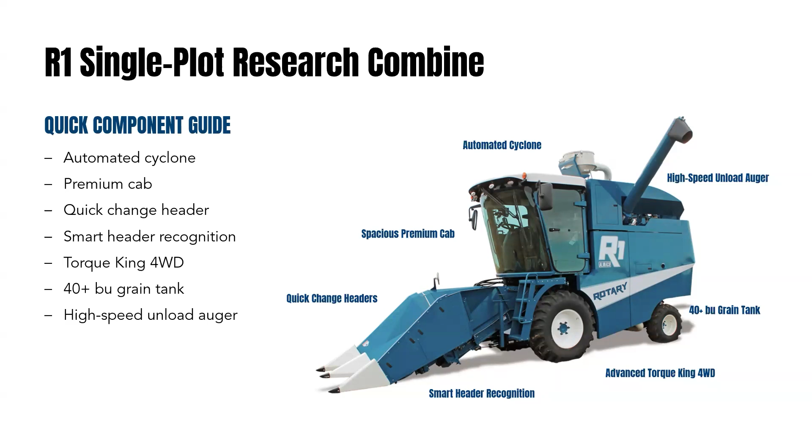So just an overall profile of the combine itself. If you look to the right, you'll see the photo of the machine itself from the left-hand side. This particular unit has a row crop head on it. We've got all kinds of different quick change headers, so it is a quick change, more like a commercial machine. You can see we've got the rounded glass cab, automated cyclone that's electrically - basically it tucks away under the profile at a top height of 10'3" for transport, and then electrically comes up and connects. High speed unload auger, 40 bushel grain tank. We run all of our R1s with the advanced Torque King 4-wheel drive - we don't make a 2-wheel drive version - and also front wheel drive on the front axles.

So some key highlights: it is a top-fed axial rotor design. Most rotors feed from the bottom. Ours is a unique design that allows us to have that clean out for each crop and each plot.

It is a true multiple crop capability combine. We've been running everything from canola, camelina, all the way up to sunflowers, corn, soybeans, sorghum, all your small grains through these machines over the years.

We do have an internal conveyor belt, which helps us with the optimum seed transfer. We can control the speed once it gets through the sieve to that air column cleaning system, which helps us with our plot speed in our shorter times.

It is a streamlined design. You can see it's very smooth and flat on the edges, especially in corn and sunflowers, where we're not damaging those adjacent border plots, or plots if we're doing 2 rows.

It's very simple and basic maintenance, very few grease zerks. The way it's designed, less jack shafts, belts, and drives on this particular machine.

And it's also set up as a microcontrolled based operating system. It's very intuitive, more of a commercial brand that you can basically run the machine with.

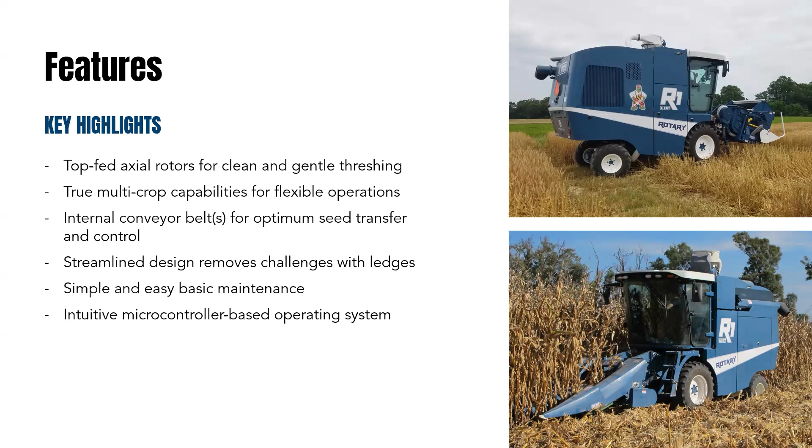So for power, we've gone to Cummins on all of our R-series combines, and even some of our commercial design machines too. This is a 3.8 liter, tier 4 final engine.

You can see from the top right-hand picture, the top assembly just folds down. It's got a built-in ladder assembly. You can walk up and change filters or do any sort of maintenance from the rear of the combine.

Most of the daily checks are from the ground, so you're not even having to get up here, but we do have access. On the 4-wheel drive, lower right, you can see it's a very beefy axle with our 4-wheel drive. We're on the Poclain brand drive motors and electrically controlled hydraulics.

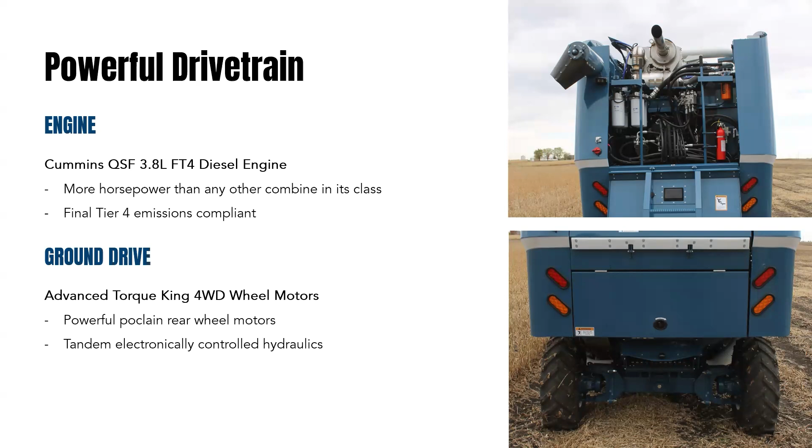So in the cab itself, this is from the driver's view. On the picture to the right, you'll see the main microprocessor controller that's basically running all the settings for the combine, your diagnostics, your error messages, your engine control codes.

And then above it, we've got this selection of either the ALMACO electronics or the Harvest Master electronics. So it is in the cab itself.

It's a very big cab, 106 cubic feet, expanded curved glass. You can see from the vision of this particular person from the right side, it's a very, very nice vision for going through the plots, and for safety wise.

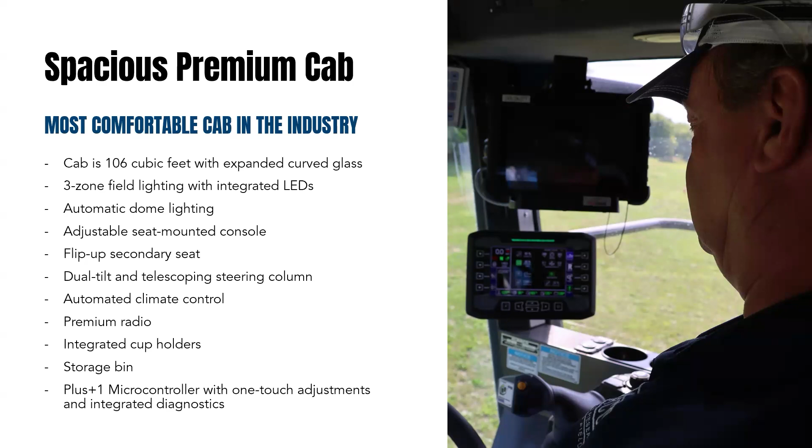We've got a flip up secondary seat, telescoping wheel, all your premium radio, cup holder, storage bins, and all your one-touch adjustments right from the screen.

So the rotary itself is, like I said, newer technology, and it's our design that we're going to continue down this path on our R1 and R2 brand combines.

So in the past, and currently, we used to use, and a lot of our competitors use, a conventional threshing cylinder, where, as shown in the picture to the right, you're basically feeding from a feeder apron belt into a lower concave that's adjustable into a metal rasp bar enclosed cylinder.

They're easy to manufacture. One thing that's nice is the rotor itself - the conventional cylinder requires a higher horsepower, plus higher RPMs to thresh the grain.

It requires a really tight tolerance. Sometimes you're in green stem material, and you can get material wrapped around where that belt is leading into that concave lip and then into the cylinder.

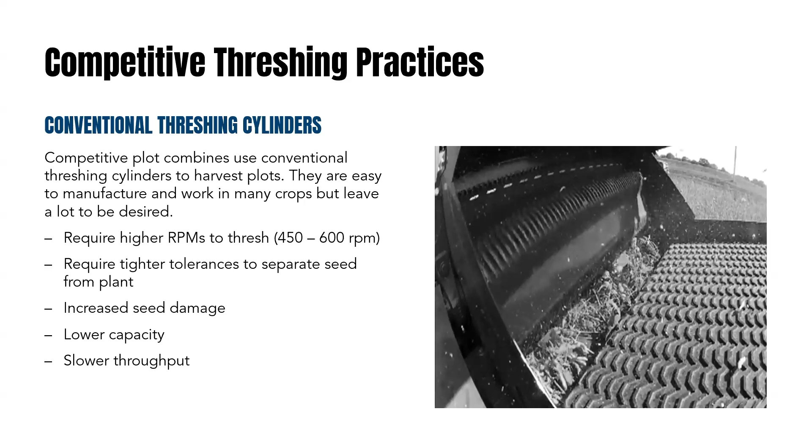It does increase the seed damage because of the speed of the cylinder. It's a little lower capacity, and it's a slower throughput.

With the rotor technology - and this is looking at from the rear of the combine - our rotors are really unique because they require, we can run a lower RPM. Where normally in soybean harvest, you're between 450 and 600 RPMs as far as your speed on your conventional. We can be down in that 350 to 500 range.

It is a top fed axial rotor. It is 15.5-inch diameter by 99 inches long. So you have all that distance, or that length, to thresh that material, and it can do it very gently with that lower speed.

The seed loss also is better because we've got all that length to be able to either open that pod or shell that ear through, and it gives us a better quality with that lower speed.

Very easy as a multiple crop. There's 5 concaves, and they slide out the rear. We have a single sieve instead of a twin sieve, where you'd have your top and bottom sieves. So that helps with our throughput.

We're seeing about a 30% increase in throughput time, from when it hits that nose cone of that rotor until it's out the rear of the combine.

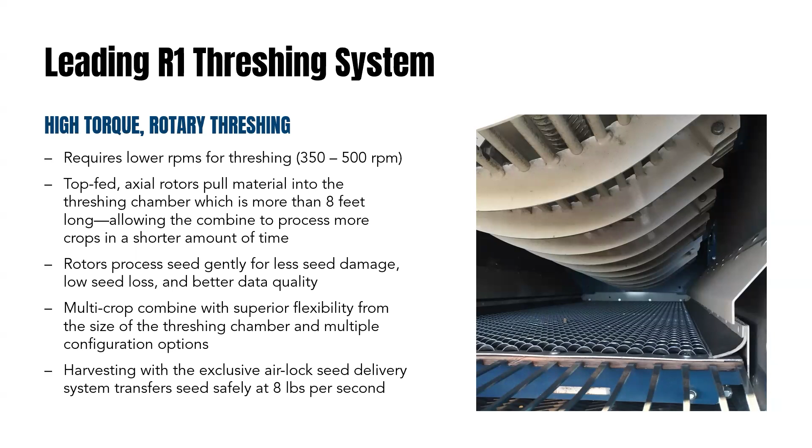Harvesting with this, we run our airlock right below our internal conveyor belt. As the seed dumps into the airlock, we're metering that in our airlock system to help prevent any plugging. We can safely move about 8 pounds per second. It's a very fast machine and high capacity.

The rotor itself is the advancement we've done where it's a top fed rotor. So we're feeding it from the top, and that allows us to have a very tight tolerance around the vane of the rotor itself. We have multiple different vanes, either smooth, serrated, or a chamfered vane for different types of crops, depending on the stem size and how it's being fed.

If you're using an increased harvest window, the rotor can get into that field a little earlier in the day and stay a little longer. When you get that moisture or buildup of moisture in the morning, or it starts to come in at night, especially in soybean harvest, over the conventional cylinder, you're going to see that increase in harvest window.

Like I said, it is a self-cleaning patented rotary technology that we have here to make sure you're cleaning those samples between plot to plot. It is faster, more efficient. It's just better results with less time.

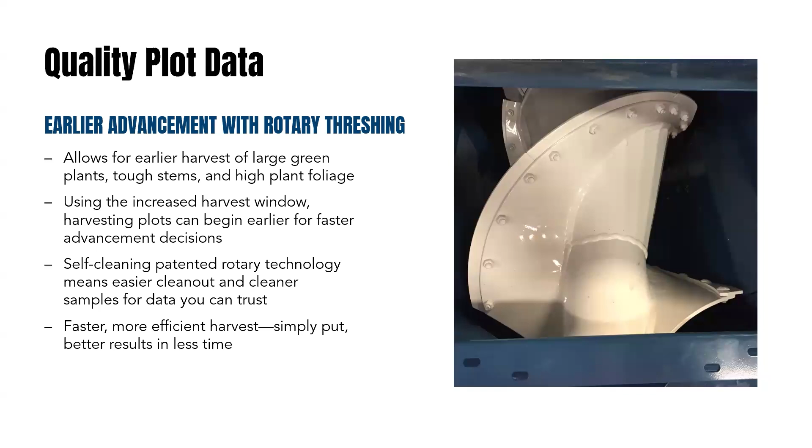So this is kind of doing a performance comparison. The rotary combine itself, with the advanced air column cleaning system and the air delivery system, we're seeing about a 30% faster throughput from the time we cut that plant at the header to the time it's in your bag after sampling.

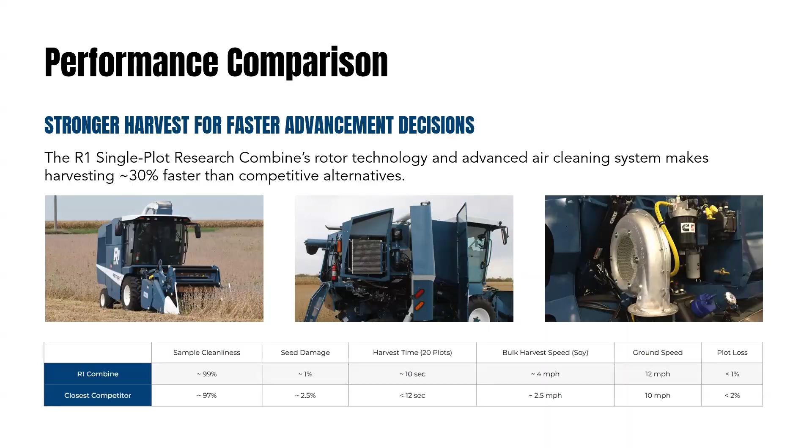So let's talk about multiple crop configurations. One thing we do with our innovative control system and with our headers is it has auto recognition. So with our R1 and R2 combines, we can run several different headers. It knows what that header is as a profile on the screen.

On our row crop head, which we're known for throughout the industry, especially the soybean industry, we have a patented belt design. Our row crops are floating. You can see we don't run a gauge wheel on the side, we run a rotary disc. It's got spring tension that's adjustable, and it allows you to cut closer to the ground, float, and instead of shearing through those lower pods in the soybeans, we can get those complete plants into the combine itself.

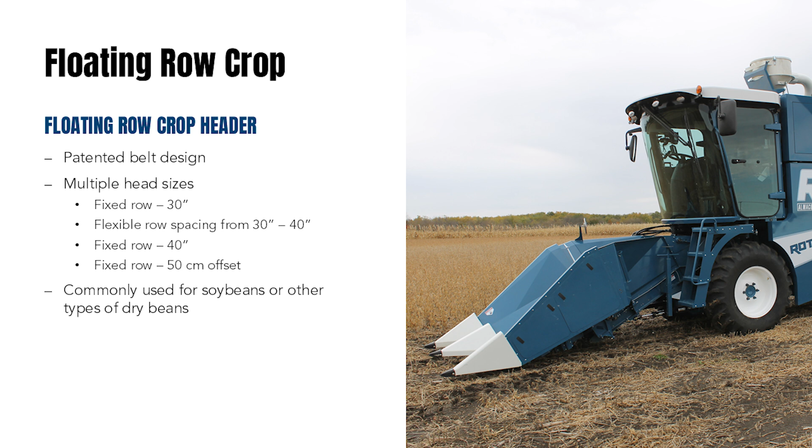So these are commonly used for soybeans. We do have a lot of applications where we have really short dry bean applications up in Canada and up north, where they like the row crop head to be able to get all of those beans and that entire plant into the combine itself.

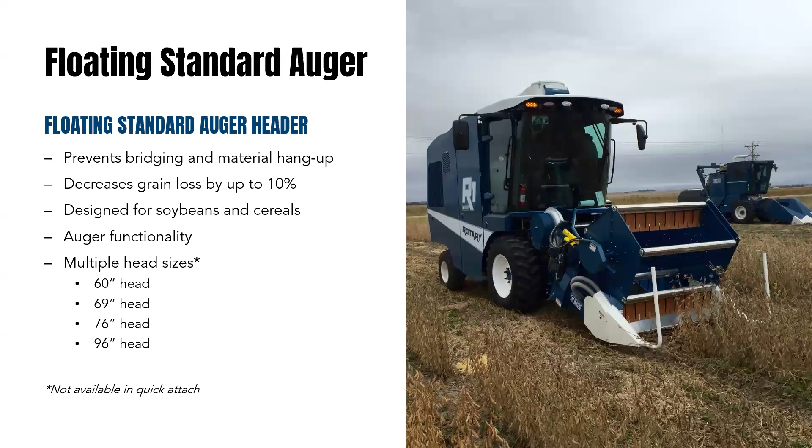We also make a floating standard auger header with the unit itself. It prevents a lot of bridging and material hang up with the auger. We're saving a lot, we can cut very low to the ground. It's also a floating application with the sickle knife. We've got units with air jets on it, without air jets on it, and we make that in multiple different widths: 60-inch, 69, 76, and 96.

Then we come to our most popular header, our newest header. It's been in the industry for about 5 to 6 years, which is more of a draper header. We don't need the air delivery or air cleanout on this particular header. It can be floating to rigid, so it allows you to go from small grains down to soybeans. It also has a sickle bar with a large range, especially on the multiple head sizes for a 60-inch and an 84-inch. We're using this for basically small grains, dry beans, peas, all the way up to your soybeans.

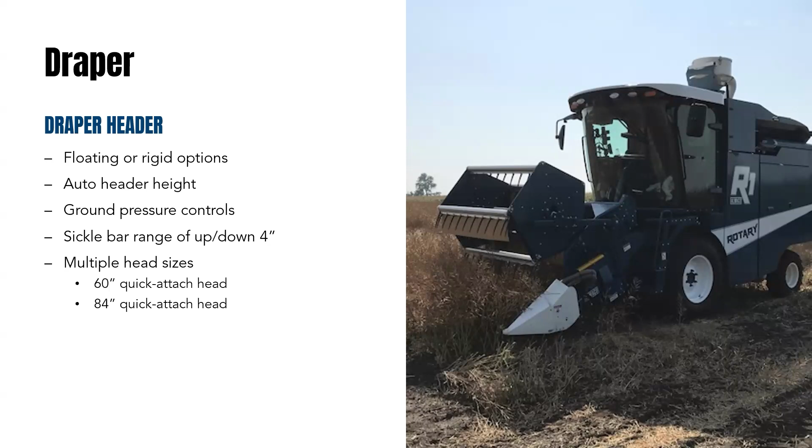Our newest header, developed a couple of years ago, we took our row crop design and made an actual new sunflower header. Of course, sunflowers depend on whether you're doing oils or confections. Both, especially on the confection seed, have very large heads. We've got a cage assembly to keep all that material and those heads in the machine, an auger and a beater bar to bring it back, and a modified row crop to grab that plant and keep those heads, without the front sunflower tray pans. So we've increased the sidewall height to keep those heads in. You can see it's a custom design on our snout assemblies: our center snout, our middle snout, and our outside snouts.

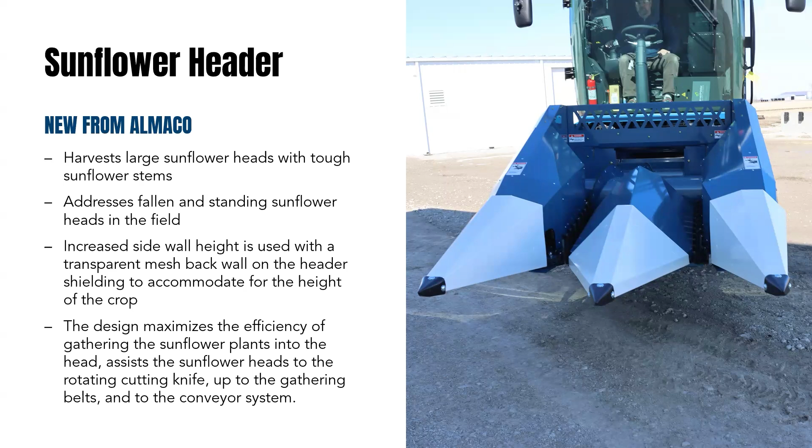One thing it does is it really assists sunflower heads. We're using a rotary knife and the gathering belts and conveyor system to bring that right to the rotor.

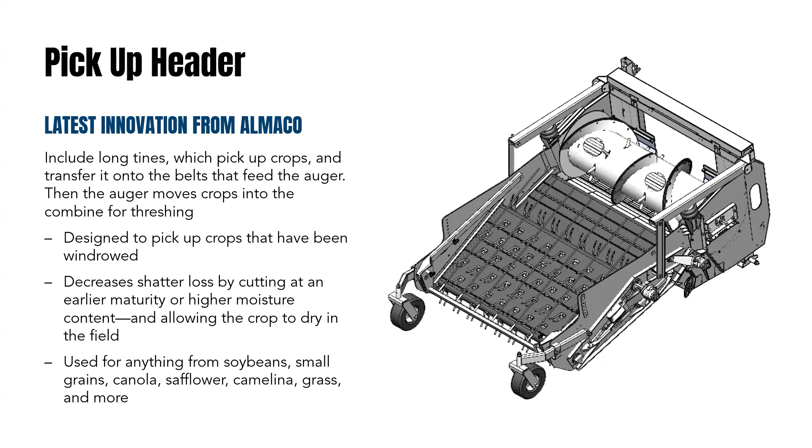The other latest innovation we've done is we've had a lot of clients ask us for a pickup head. You might have some small grains that you actually windrow and need to pick up. We've got some folks doing increases in soybeans where they like to cut them green, let them dry, and then pick them up. So this is a drawing of the physical system itself. We're running a double apron with tine pickups, using this in a situation where you're not harvesting direct, you're windrowing, letting it be cut at a high moisture, maybe an early maturity, then letting it sit on top of the ground and dry. Currently this is designed for soybeans, small grains, canola. We specifically designed this for safflower. We've also got camelina and grass seed.

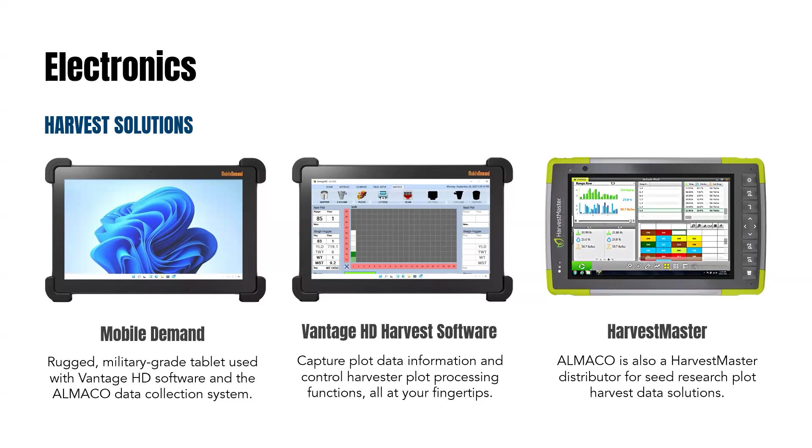So let's talk about the combine electronics. ALMACO, we're a supplier on the harvesting solutions side. On our handheld computers, we run the mobile demand with the ALMACO system, which is a rugged military grade tablet that we use with our Vantage HD software and ALMACO data collection that we do in-house. We also have the Vantage HD harvest software, developed in-house, that's linked to all of your harvesting needs. We're also a full dealer and distributor of the Harvest Master system, showing up a Mesa Pro with the Mirus software. Any one of those packages, depending on your application, we're able to install on our R1 series combines.

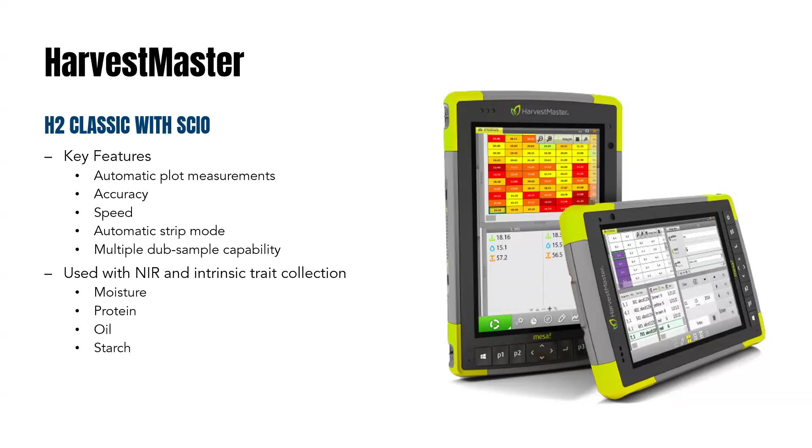A lot of the key features with the Mesa Pro include a lot of automatic plot measurements, very accurate, very fast in speed. We like being able to use it in combination with strip mode or just normal plot mode. And we can do multiple sample capabilities, running conditional actions within ALMACO for different features and collections within the combine itself.

So on the ALMACO side, ours would be the D1 data collection system. This is for you folks that have the LRX Seed Spector, whose end of life was in January of 2025. This would be the upgrade you'd change over to from your LRX.

What's nice about this is it's an integrated user interface. It's easy to calibrate, with all built-in diagnostics. There's no internal battery like the LRX had, so you don't have any risk of losing your moisture curves or calibration curves with a power loss. It's also a more durable design.

We don't need to have this in front of your eyesight. As you can see, the aluminum enclosed container can be mounted in the cab, below the seat, outside, in the unit itself, and everything is integrated within the mobile demand or the Tough Book itself, or the Tough unit itself.

So we've got this data capture set up for virtually all the crops you've used in the past, and it's compatible with your plot combines. We've made portable threshing units that sit right beside a thresher. We can also be integrated into seed processing, and we've got it set up to run our packaging units.

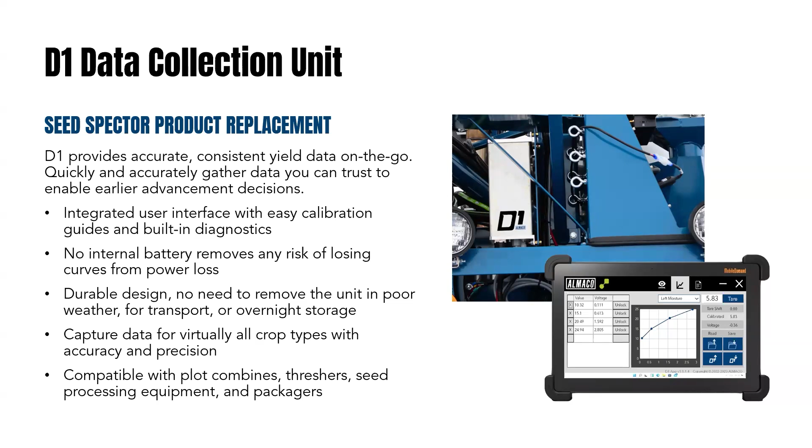So let's talk about some of the advantages of some of the upgrades and accessories that come with the R1.

One thing that's unique about it, for safety, is that on our older machines, you'd have to actually get out of the cab and fold the cyclone up and connect it. This R1 has a button in the actual cab itself for the operator.

So that allows you to be at 10.3 feet on a 36-inch trailer, staying under your 13.6 feet legal height.

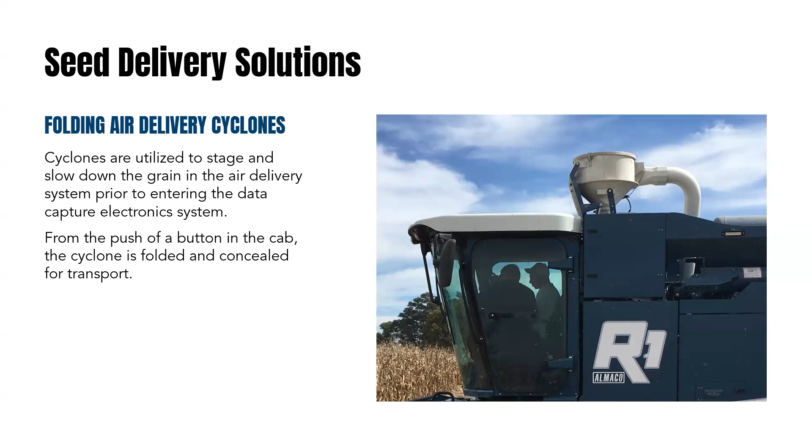Other options include any sort of in-cab bagging funnel, adapters, and all kinds of different bags and envelopes, smaller or large, for collecting grain. You can have one person with a manual valve, one person with an electric valve, or there's a buddy seat in there for a second person.

We also have the packaging technology, which is our patent, the APX. This basically eliminates that second person, making it more of a one-person operation. It's right in the cab.

It's a bag that we produce with a barcode connected to your plot number. You can have that all set up, and you can automatically do a percentage or volumetric sample size. Maybe it's only 1 to 3 pounds that you like. If your sample's over that, it'll discard to the grain tank, or you can do a full bag sample with it.

We've got 3 different bag sizes that collect up to 3, up to 9, or up to 12 pound samples, and we have different color configurations.

So maybe you have a trait that you want to track one year. You can make that bag yellow, red, blue, orange, or green. We have lots of different options for you.

The bags have holes in them, perforated to tear off within the packager, and the packagers have rolls that are pre-printed and pre-numbered to match the bags, which we'll select for you depending on size.

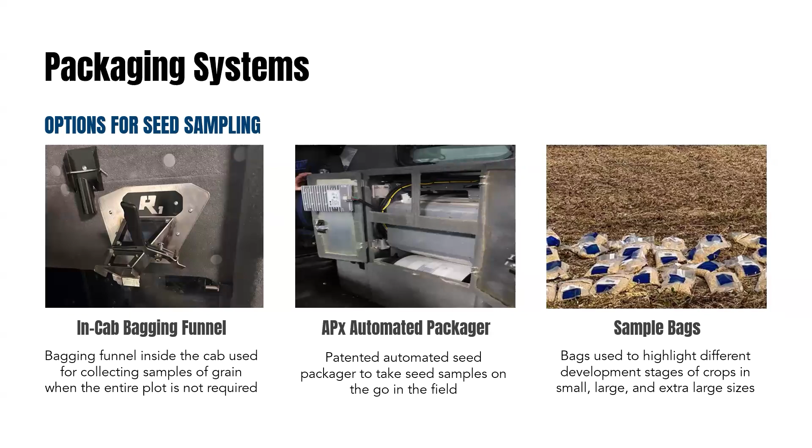If you want a more automated system, there's a dump hopper that holds between 100 and 125 three-pound bags and hydraulically dumps at a 72-inch dump height. You can have a buckhorn box or a plastic bin in the field at each end, or on a 5th wheel trailer, and dump right into it.

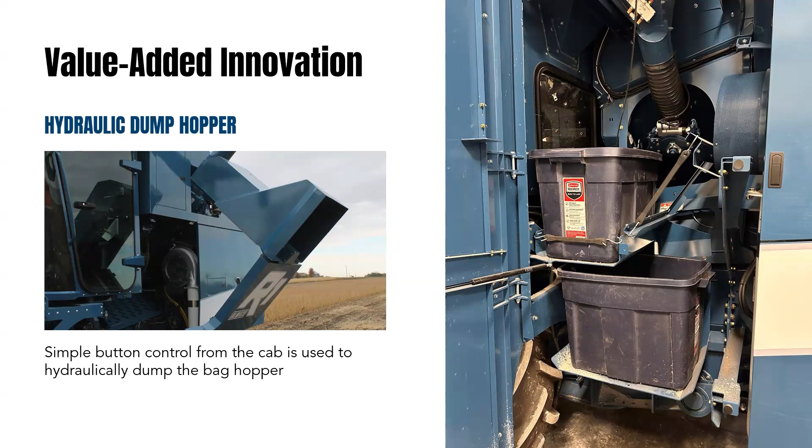So that eliminates some of that strenuous work of pulling totes back and forth and moving those plastic bags.

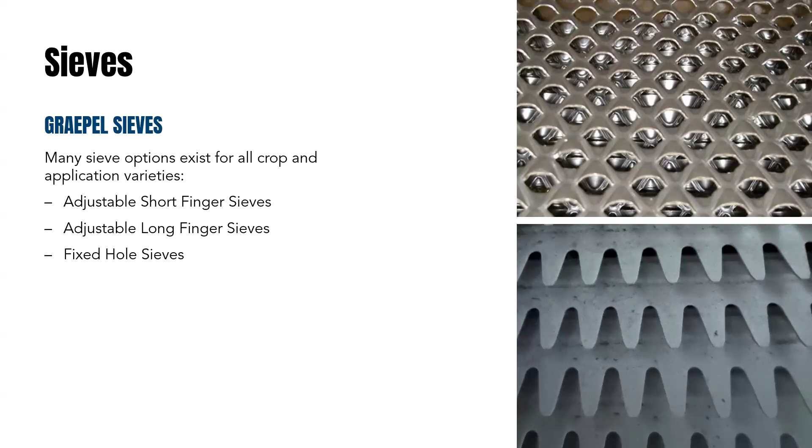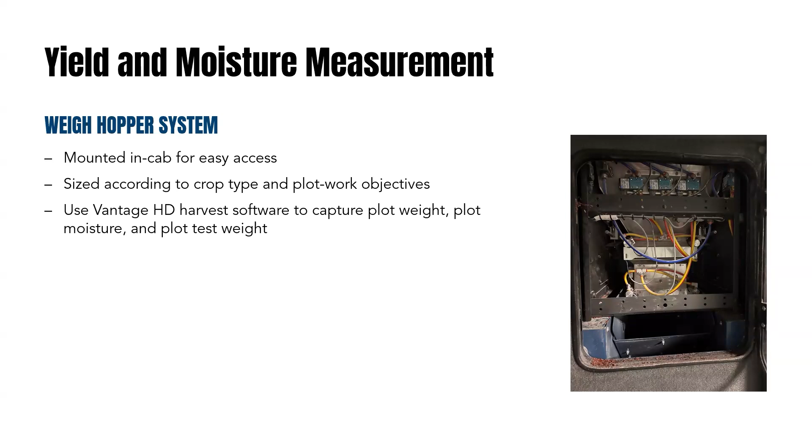Below that, we have a little teeter-totter door that lets you either send sample directly to the grain tank, collect a full subsample, collect a partial subsample, or collect a full sample right in the cab.

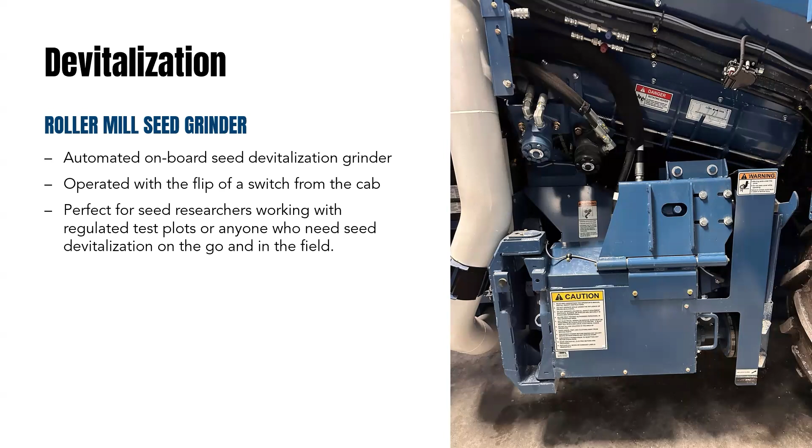If your research requires crop destruct or seed devitalization, we have a roller mill that's hydraulically driven and tucks right underneath the outlet of the cleanout for the grain tank, behind that front right drive tire. It's pivoted, so you can unlock it, bring it out, do any cleaning or maintenance, check your magnets, and have full access to the grain tank cleanout on the transfer auger, plus access to the access panel for your concaves and nose of the front sieve.

On the rear, if you don't have cooperators, we have a normal guide funnel that comes off the back of the rotors, allowing debris to go over the top of the axle and follow behind the combine. If you have cooperators or want to make sure you don't get those little beaver huts behind the combine at each plot,

we use a rotary knife that's hydraulically driven. It's got adjustable stationary knives down below with quick releases, giving three different points of depth for the stationary knife relative to the rotary knives, producing either a finer or a larger cut of the stem and material. It swings out and locks in place, so it's very easy - you don't have to disconnect any drive circuits. It's tied to a sensor that knows it's in place, and this allows full access to the back of the combine.

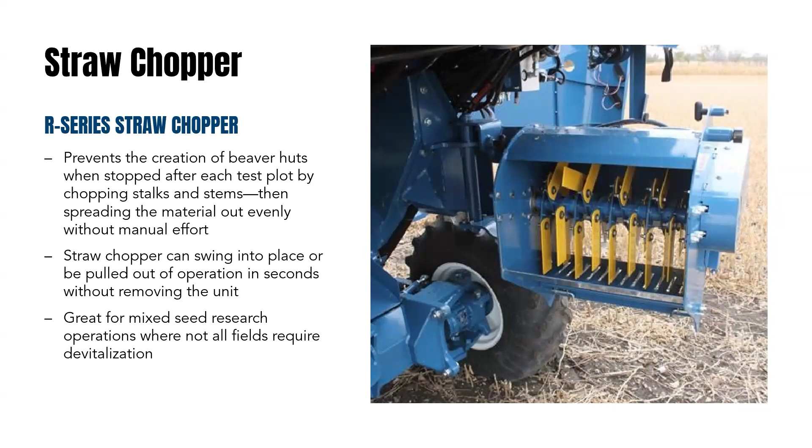Perfect. Thank you, Todd. Now that we've taken an overview of the R1 combine, we want to transition into the service that we offer here at ALMACO, and we'll pass it over to Matt Titus.

Thanks, Lisa. I'm Matt Titus, the service director here at ALMACO. I want to take a little time to talk about what we offer as a service department. One thing I want to highlight is that we offer global support - meaning 24/7, 365 days a year, we have technical support representatives on call to best assist you with your needs.

If you need on-site service, we are set up to have one of our trained field service technicians on site as fast as possible to provide resolutions for your down equipment. Last year we were able to provide on-site service on 6 different continents. We do that by strategically having 3 different locations on 2 continents from which we can dispatch parts and technicians.

Our first and foremost global headquarters of ALMACO is here in Nevada, Iowa. This is our main production facility for all of our equipment and parts, and also where we house our engineering staff to aid in any customization or develop new products. Lastly, our main central service department is located here, capable of handling any repair or service for ALMACO equipment.

Our second location, which has been around for about 10 years now, is in Uberlândia, Brazil. Here we're able to manufacture smaller products and parts, and this is also one of our other service centers and parts depots. Lastly is our newest location in Chacabuco, Argentina, which serves as a service center and parts depot as well.

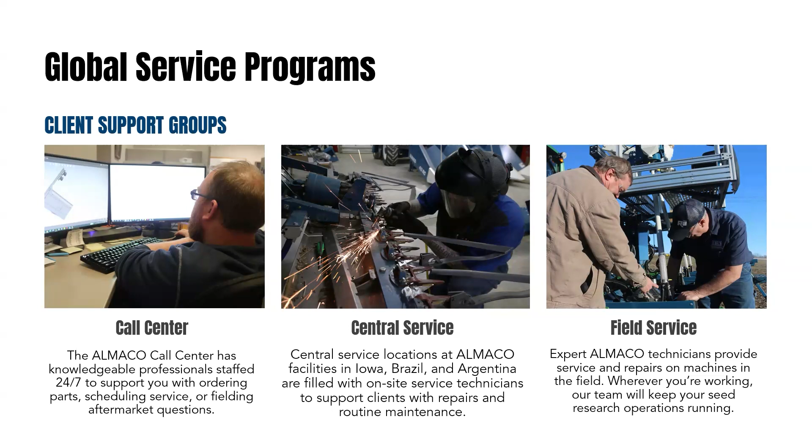I'd like to talk a little bit about our preventative maintenance packages. We're going to highlight mainly our plot harvesters and plot planters here. As part of our pledge to keep your equipment up and running to its optimal performance, we offer preventative maintenance packages that can be performed in field or in one of our central service locations.

For harvesters, this package will include a 118-point holistic inspection and calibration, parts and labor for maintenance checks, such as oil and filters, routine cleaning, and standard maintenance, which would include belt tensioning or greasing bearings, etc.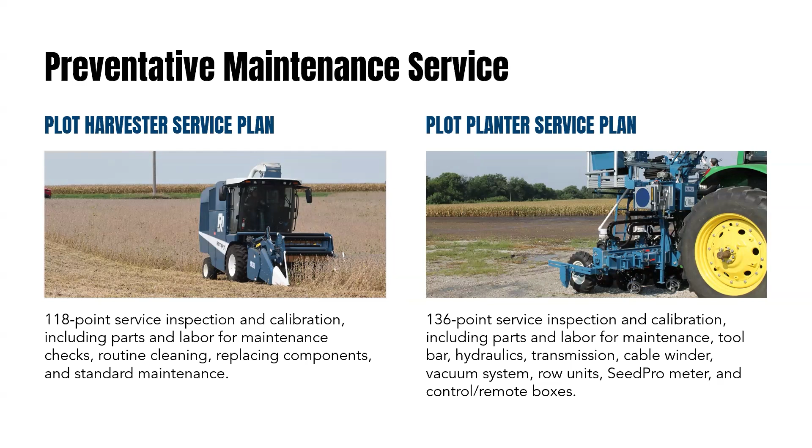For planters, it's much of the same, but it includes a 136-point holistic inspection, calibration, parts and labor maintenance checks, routine cleaning, and standard maintenance.

As part of our commitment to industry leading support, we pledge to have the right parts right now. So what this means is we pay close attention to what parts are needed seasonally to make sure we have an adequate inventory of those items during peak seasons to reduce your downtime and keep you running.

We also offer the best in-class warranty for exceptional peace of mind on parts and repairs performed by ALMACO. We want you to feel as confident in your equipment as we feel in providing it to you.

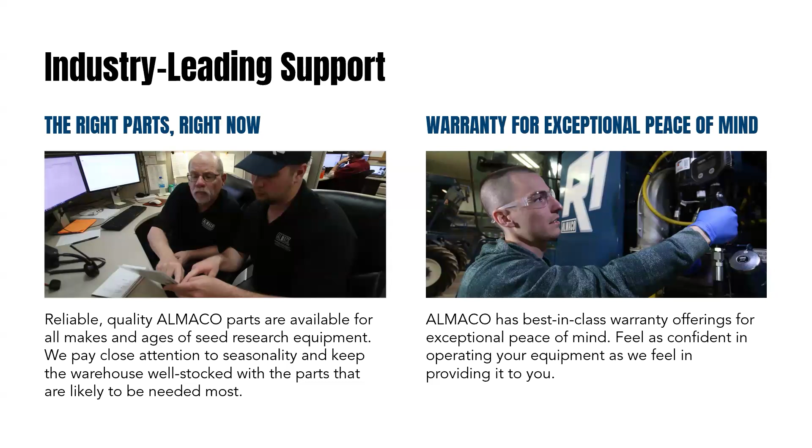Another way we are able to offer exceptional support is through our telematics system. Telematics is the system that provides remote access to real-time data on machine settings, uptime performance, efficiency, location, software, and diagnostics. Since we implemented telematics on our R-Series combines, we have been able to resolve 30% of our service-related cases without dispatching a field tech.

This saves the client money and reduces downtime. We are also able to push software updates remotely without an on-site visit, saving time and money.

As a bonus to you, the client, you are able to access your own dashboard to monitor your equipment in real time. That will allow you to provide operational recommendations to machine operators for best seed trials.

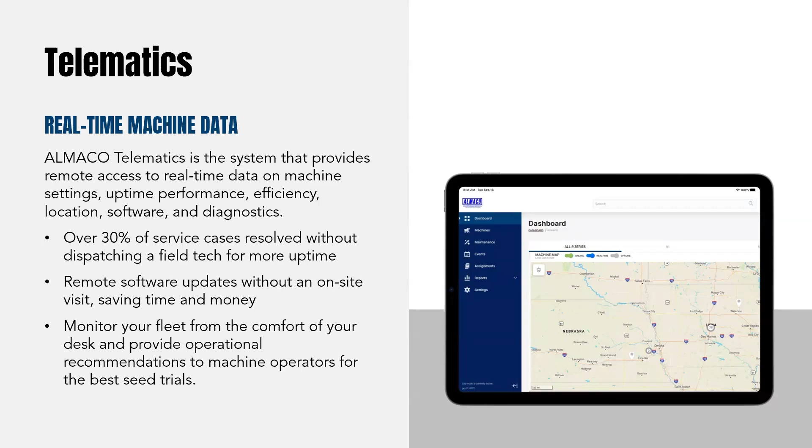Okay, thanks, Lisa. So we talked about the D1 package we've got for our harvesting data collection system. We've got a savings plan incentive right now where if you've got a fleet of these, from 2, 3, 4, 8 plus.

You can actually receive a fleet discount on the purchase of multiple D1 units. We've got 10% off on quantities of 2 to 3, 15% off for 4 to 8, and 20% off if you order 8 or more units.

You must be able to take at least 2 of these D1 units prior to March 31st to be eligible for this plan.

We have multiples of these D1s in stock, and so lead time's pretty short on these, so you can still order these prior to that March 31st for those 2 units.

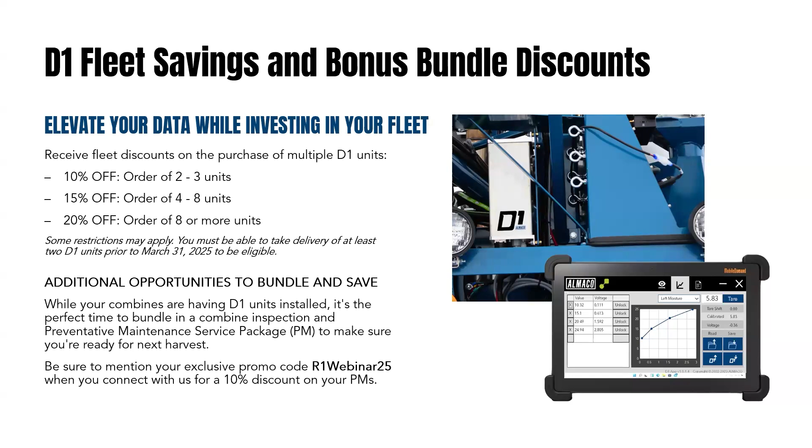The other promotion we have out is a thresher sheller promotion. For a limited time, till February 28th, 2025, if you purchase one of our threshing and shelling pieces of equipment, such as a Maizer or belt thresher.

You can choose between either an air blast seed cleaner, pictured there in the center, or a lab cleaner, 110 volt, down below. It comes with 2 screens. You can actually run material through it and fine clean that material.

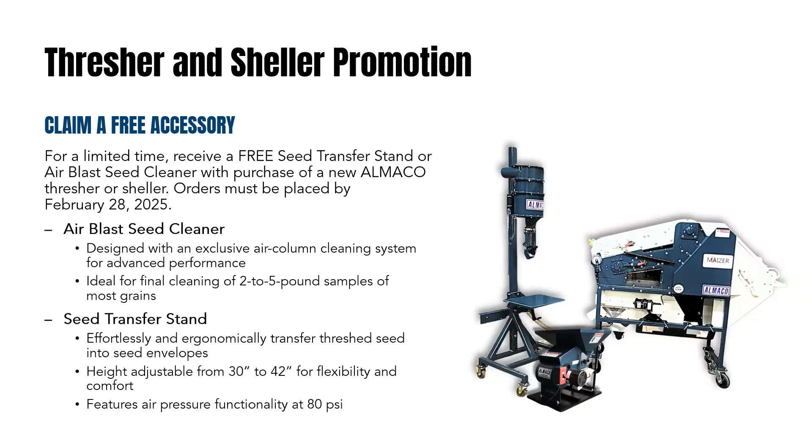Or if you would prefer, there's a seed transfer stand that you can move to one of our threshers or shellers and bring that material back up to a more ergonomic level. It's a portable stand that you can tuck away when not in use, or roll it out into your lab and connect it to those threshing or shelling units. So if you'd like to have that, we can quote you the thresher or sheller, and then you can pick and choose between those two free products.

The other thing we have with our webinar today is we've got a new R1 pricing program. This will be limited pre-harvest production capacity, but we'd like to build as many as we can. ALMACO is offering a limited time pricing promotion on the R1 single plot research combine that you saw earlier today. So what we did is put a corn package and a soybean package together. This doesn't necessarily mean these are the only two packages we have. If you're a sorghum person or a small grain person, we can put a similar package together for that.

So just to go through, if you purchase a corn package, you get your base R1 combine with all the features, the premium cab, and premium tires on our units with our headers. You can pick a 60 or 66-inch wheel center. It comes with adjustable corn sieves, all your correct concaves, your quick attach throat, and a 2-row corn head. It comes with the Harvest Master H2 system and install, along with your Mirus software and handheld computer. It has the rear discharge chute, electric cyclone with the air delivery system, our upgraded 6-inch transfer auger instead of the standard 5-inch for corn, a 40 bushel grain tank, and a standard unloading auger with a 10-foot 6 height. That's a good package. We have multiple options we can add, but this package would be great for anyone for their research